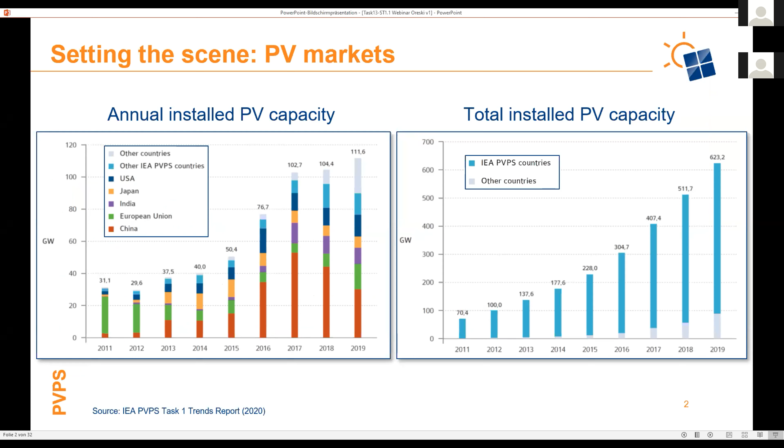Generally, we live in amazing times. The PV market is still growing, and every year we see an increase in this market growth. That sets the scene for the Photovoltaic Power Systems Programme, because PV is moving into a lot of places. We see fast technology progress, high installed capacities, record prices and record levelized cost of electricity, increasing competitiveness of photovoltaics in the market, new business models, broader applications, different customers. We see it moving into the overall energy system, constantly moving towards the terawatt era and becoming mainstream. That is an amazing thing. When I remember back to when I started my research career in 2003, people discussed PV becoming mainstream in maybe 50 years or so. Actually it happened quite a lot faster.

So what is the PVPS in a nutshell? It's an association having 32 members, mostly countries, but also 4 associations. They form a truly global and unbiased network of PV expertise, representing all main stakeholders in R&D, industry, implementation and policy. The members cover a large majority of worldwide production, application and markets.

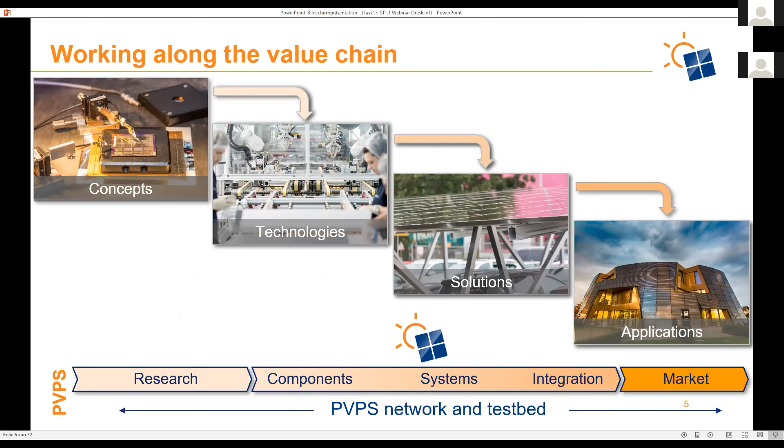We work along the value chain. In our network we have researchers, manufacturers, companies, and operators dealing with photovoltaics along the value chain. So what is our role? We look into the present and future of photovoltaics worldwide. We try to identify and understand relevant issues for large-scale deployment of photovoltaics. We collect and exchange facts and experience, analyze precisely, draw appropriate lessons learned, and communicate all findings in a clear and targeted way.

The benefits are that we provide advice for different stakeholders, including policymakers. We try to accelerate development and learning in the market and prevent errors from being repeated. We identify successful policy approaches and business models, and try to provide long-term market, environmental and policy insights, in general expanding and accelerating the deployment of photovoltaics even more in the future.

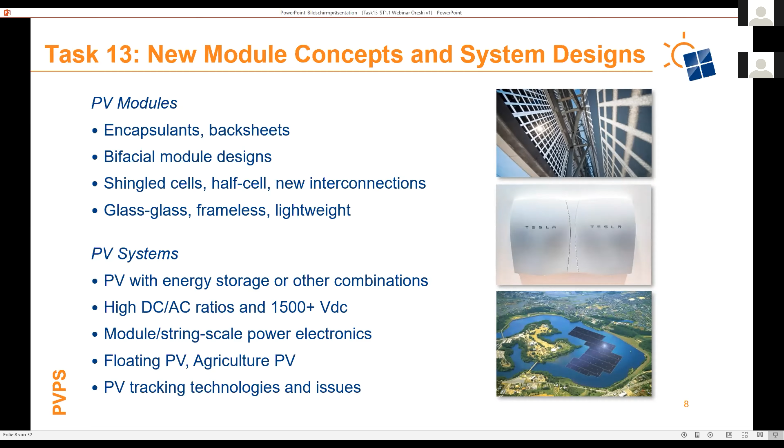Right now we have eight active tasks in the PVPS program. I'm part of Task 13, which deals with performance, operation, and reliability of photovoltaic systems. Within Task 13 we have 3 major topics. The first is to look in detail at new module concepts and system designs, especially questions related to quality and reliability of these new concepts and designs. We do a lot on performance of PV systems, especially analytics of available data, and we also look at how we can improve operation and maintenance of PV power plants.

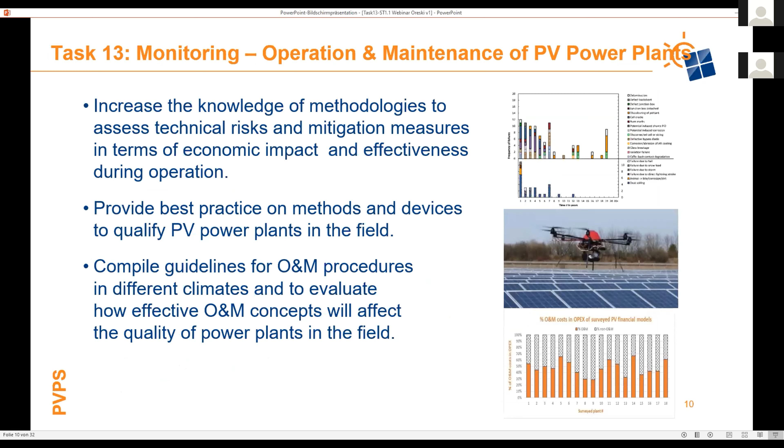Last year we were quite busy, and overall 12 technical reports were published across these 3 fields. Today we are focusing on the designing new materials for photovoltaics topic, which was published 2 months ago. My talk will start with motivation, benefits, and opportunities for new material and module developments in photovoltaics, and then Laura will continue and go more into detail on certain PV module components.

Let's start. First, I want to show you some quite interesting results that colleagues of mine in Austria presented last year at the European PV conference. We have a very interesting system installed in Austria, on top of a mountain, at about 2,000 meters height. The system was installed in 1988, so about 33 years ago. When you look at the annual degradation of these modules after more than 30 years, they're performing quite well. The best performing modules, from Kyocera, look like new.

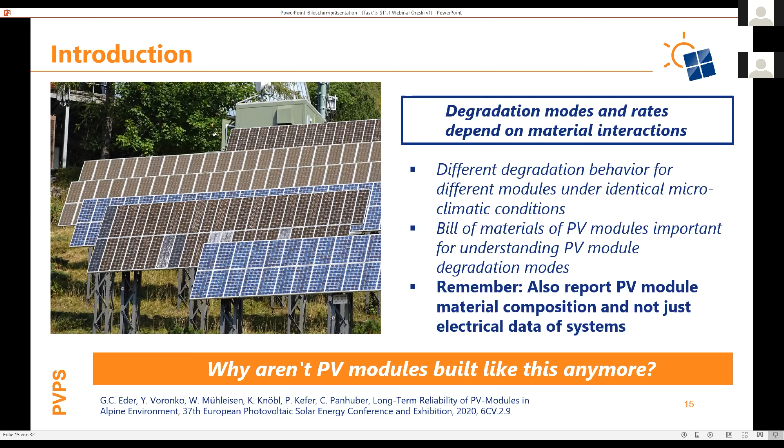So the question is that I asked myself and that we discussed in several groups: why aren't PV modules built like this anymore? So very resilient, very long lasting. The answer for that is quite easy, because...

What happened in the last 20 to 30 years, especially in the last decade, is we saw a massive decrease of price. For every doubling of the production, we saw a price reduction of 25% at least for the last 40 years. And with that, the average efficiency of the modules increased significantly from below 10% to now more than 20% efficiency for monocrystalline silicon PV modules.

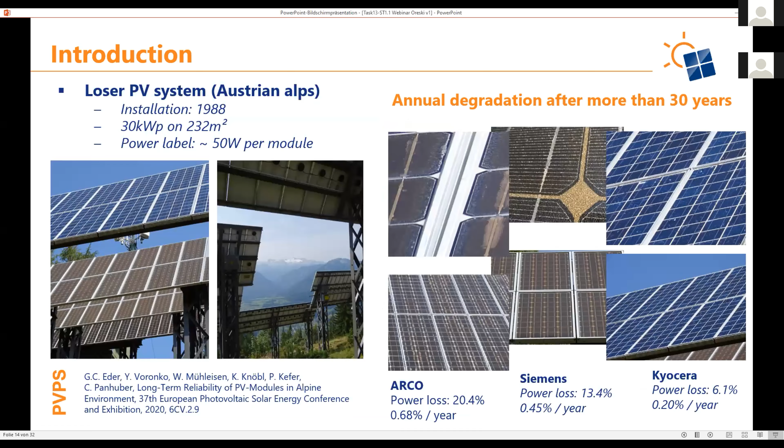As you see back here, these modules had a nameplate power of like 50 watts per module. And where we are now is we are getting into 500 watt modules and higher.

So what we saw is a big change in the market. And even though the design of the PV modules remained similar—we always have glass, encapsulant, the connected cells, the ribbon connected cells, and the backsheet or another glass layer—the materials that are used evolved.

Michael Woodhouse and colleagues from NREL actually prepared this really wonderful chart for the new ITRPV report. This is just to show you how much PV changed over the last 40 years, where we started with very small circular cells, got into small pseudo square cells, and right now we have these very big pseudo square cells.

We are going to half cells, and you just take a look at the watts per module and the module sizes that are typical. So from 40 to 100 watt modules, now we are having 600 or 400 to 500 watt modules currently. And when you take a look into the future...

actually with multi-junction modules in tandem cells, we will get modules with like 1 kilowatt of power, maybe in 10 years. So just imagine this, what happened.

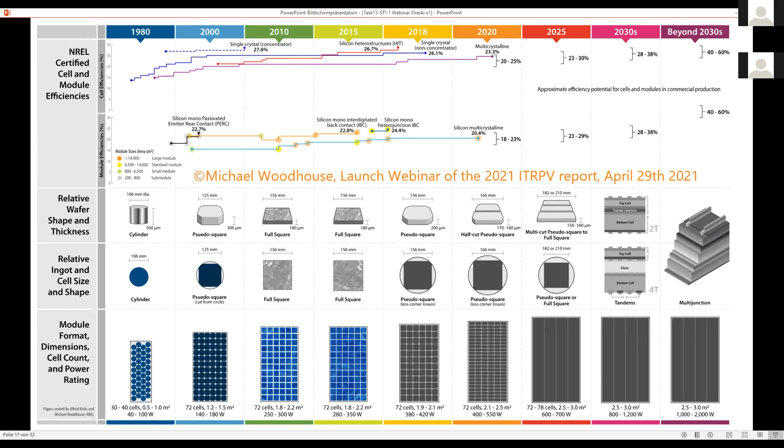So what have been the motivations for all these changes for new materials and new module designs? I would say the biggest motivation was always decrease of levelized cost of electricity. So either it's cost reduction or performance improvement. And what we saw constantly was a reduction or replacement of expensive materials.

In general, solar cell thickness went down, silver content went down, glass thickness went down significantly. We also saw expensive materials like fluoropolymers started being replaced by more economic materials. So all of that helped a lot to get a cost reduction.

And this is a process that is still ongoing when you take a look at the projections done by the International Technology Roadmap for Photovoltaic, for example, where they foresee still doubling of the silver content reduction in the next 10 years, depending on cell technology.

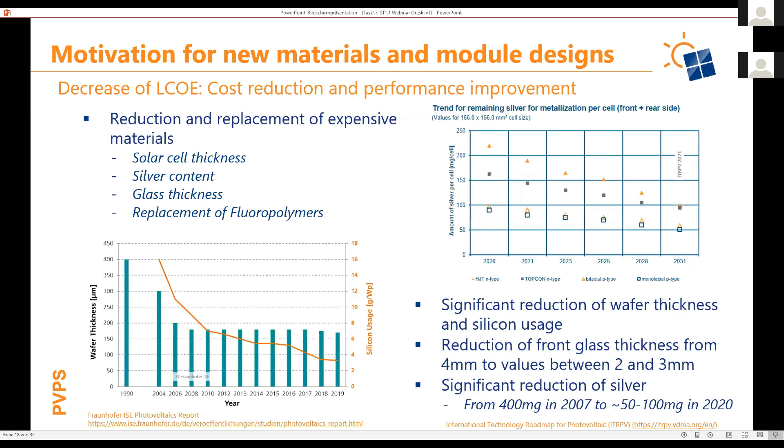So what were other factors, or approaches for cost reduction? What we saw was generally an acceleration of the manufacturing process. We started with standard cure EVA, then fast cure EVA popped up 15 years ago. Then we had ultra fast cure EVAs 10 years ago. Currently, we are getting into thermoplastic encapsulant that can be laminated with lower temperatures and lower times. So everything that gets the module production time down a little bit.

And then we had several changes and new developments that promised a performance increase. When we are looking at the cell interconnection, we saw going from 2 bus bars, 3 bus bars to 5, 6, 7 bus bars, and all of these multi-wire systems. One main motivation for the performance increase was the reduction of the resistive losses and the cell shadowing.

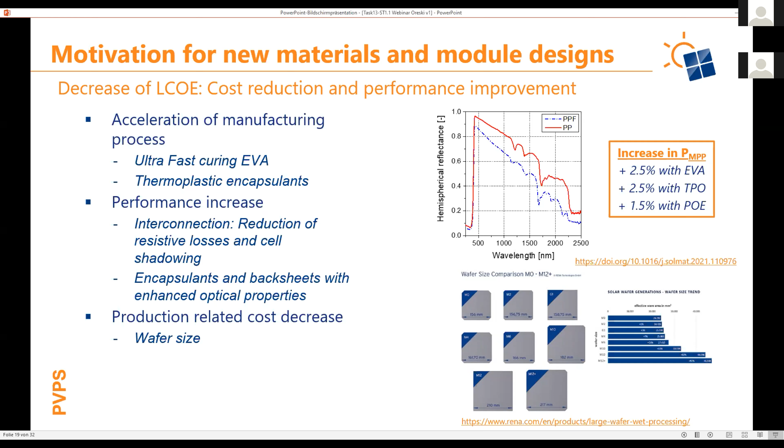And the same goes for encapsulants, so I think Laura will show you something about this. Also, what we saw in the last years was a continuous increase in wafer size, also leading to production-related cost decrease.

Another motive for bringing in new materials and new module designs is sustainability, and connected to that, certain legal regulations. Especially in the European Union, there is currently a process for eco-design of photovoltaics running, and I think it's nearly completed, that at the end we get some sort of eco-label for PV modules that have more sustainable components and more sustainable production processes.

We are starting to talk about recycling and increasing the recyclability of photovoltaics, because we are putting out hundreds of gigawatts every year, so there are billions of modules out there, and at the end of life we need to think about what to do with all this amount of material and modules.

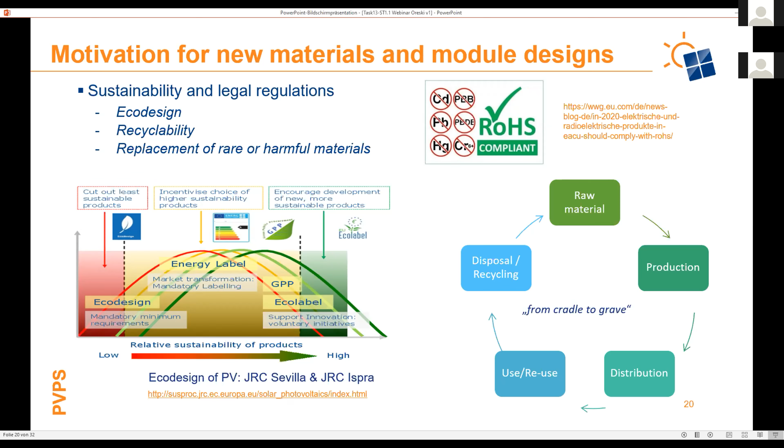Also we see, at least in the European Union, legislation like the ROHS legislation for electrical devices, where rare or harmful materials should be replaced. For example, lead is usually not allowed anymore in any electrical device, and photovoltaics is just one exception here. We don't know if this exception will continue forever, or maybe in a few years the European Union will say you have to get rid of the lead and replace it with another material, meaning the whole interconnection needs to be changed, especially the solder material.

Another big motivation for new materials and new module designs is new technological requirements. Here we are looking mostly at new wafer technologies or bigger wafers. In the last years, we saw quite a change in cell and interconnection technologies, and also new module designs were brought up.

What we see right now is actually a very big shift from aluminum BSF cells going to PERC and heterojunction, which will become the new dominant cell technologies. We see half cells gaining more market share, and we also see module sizes increase.

Especially for heterojunction cells, which are more sensitive to, for example, temperature-induced stresses, these cells are predominantly interconnected with multiwires, which is a totally new approach for interconnection.

But we also saw that structured foils, for example for back-contacted cells, are gaining more attention, and shingling will also be a topic for the future, becoming more important. All of these technologies combined have one thing in common: they lack long-term outdoor experience. We know a lot about indoor tests, but we still don't know how these shingled modules and multi-wire connected modules will behave in 10 years or 20 years.

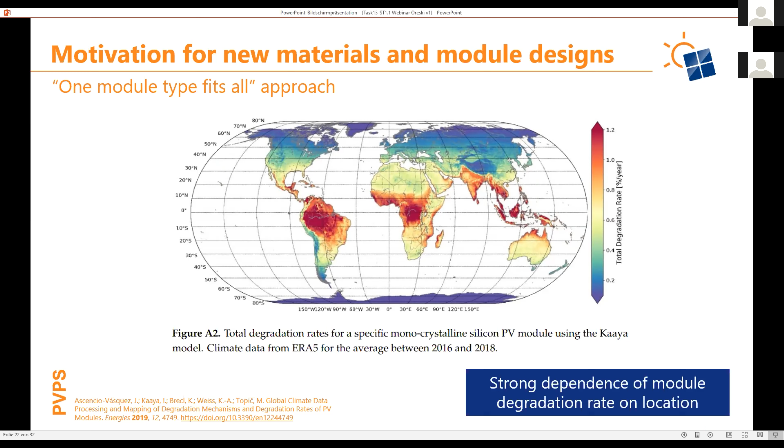Also what is a big topic right now is integration of photovoltaics. And by integration, I mean integration into nearly everything. So we talk about vehicle integrated PV, building integrated PV, PV integrated in transport infrastructure, like this nice Austrian project in cooperation with Germany and Switzerland, where they want to make roofs across highways made of photovoltaics. We talk about integration of photovoltaics in agricultural land, and a very big topic also, floating PV.

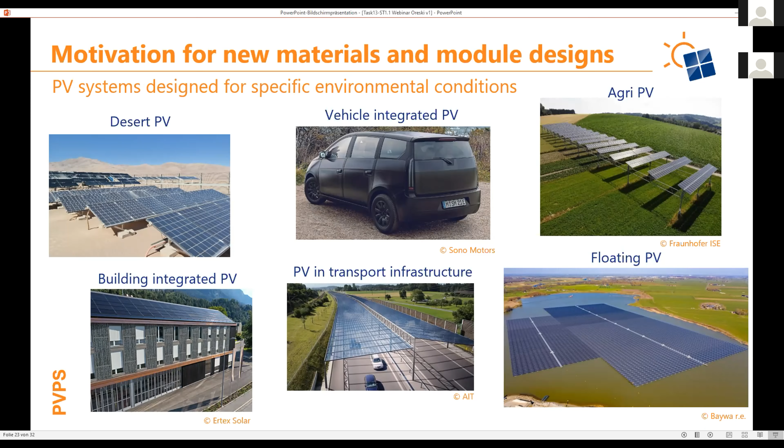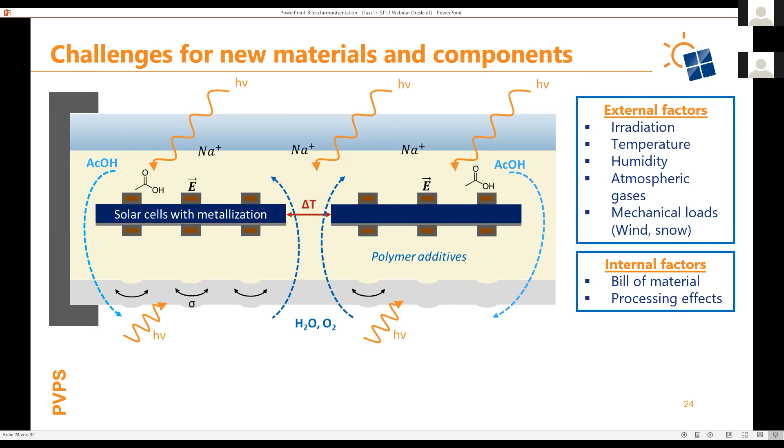So what are the challenges for all these kind of new materials, for these new PV modules? The challenge is shown here schematically. This should be a cross-section of a PV module with cells, interconnects, glazing, encapsulant, and backsheet. And you see we have a lot of external and internal factors, stresses acting on the PV module, from irradiation, temperature, humidity, atmospheric gases, and mechanical loads. And of course, the composition of the PV module, the materials you use, and the processing effects also influence the long-term behavior.

How do they do that? The materials have to withstand all these stresses at the same time for a very long time. Photovoltaics, or let's say PV modules and PV materials, have to withstand an extremely challenging microclimate with acting stresses all at the same time.

And when you change just one component, like you put in a new encapsulant or put on a new backsheet or some new interconnection material, you can change the whole equation here, you can change the whole set of reactions and change your degradation behavior significantly.

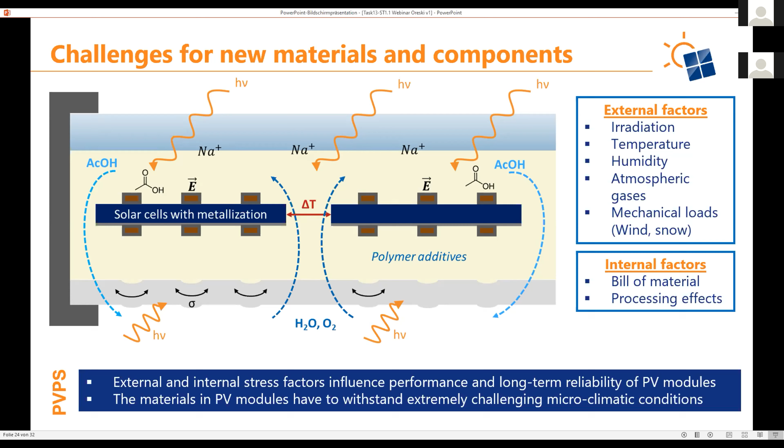And what I see, that will be the interesting part, at least from my point of view as a reliability engineer: what will happen with all of these new materials? I have the feeling we will see a lot of compatibility issues in the future. When you combine the wrong materials, you will have problems with adhesion, and we will see more delamination. For example, when you have new encapsulants and combine them with a standard backsheet, but the backsheets are usually optimized towards adhesion for EVA, which is the standard encapsulant, then maybe you will get some problems.

I would say yellowing in general, discoloration, will be a big issue. It has always been a big issue, but with new material combinations, you will get new possibilities for this yellowing. The same is true for corrosion, because we see a broad variety of new ribbon materials, new interconnection technologies, new encapsulant films, new backsheets. All of these are influencing, let's say, corrosion.

And what we saw in the last 10 years is also an emergence of new degradation modes. So until 5 years ago, just my assumption, nobody spoke about LETID, light and elevated temperature induced degradation. 10 years ago, it was all about discussing PID. All of these issues came up with new technologies, like new cells, new cell designs, new encapsulation materials.

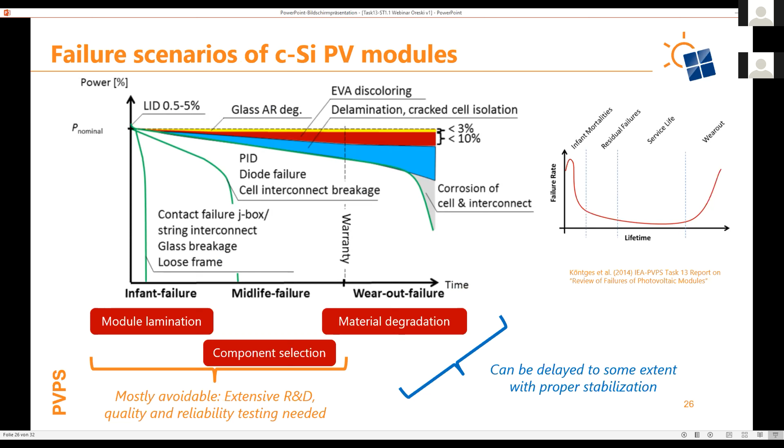But infant failures are very often correlated to bad lamination, bad processing. And midlife failures are also very often correlated to bad component selection. Many of these failures can be avoided by extensive R&D, by extensive quality and reliability testing. And this is still something the PV community has to do, while other industries, like the car industry, are way ahead, because they do much more long-term reliability testing than photovoltaics, even though their product is not there for 25 or more years.

So how can you do testing? That's what we usually use in polymer engineering. We have some sort of test pyramid. You start with a material, where you can test a high number of specimens at a very low cost and effort.

And then you go up, you test components, films, laminates, mini modules, up to full-size modules. But the higher you go up into your testing pyramid, the higher the cost and the effort of testing. Nevertheless, you need to cover all of these levels, because you learn something different on all of them.

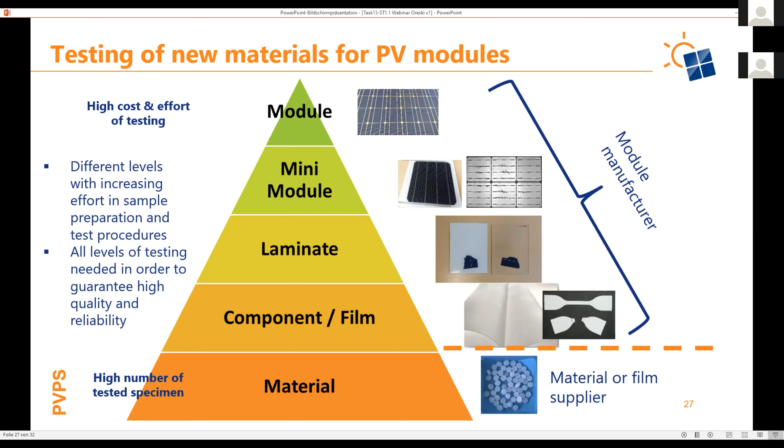And it's an effort, but it's an effort you need to do, and actually everybody in the PV community should do, in order to avoid unexpected failure modes. And just to summarize, I want to present you one of these unexpected failure modes.

I think all of you have heard of the polyamide backsheet failure. These co-extruded polyamide backsheets were introduced into the market in 2010 by an Austrian company, and it was a big success, an instant success. So what was the motivation for this backsheet development?

There was a problem with the raw material supply for the then-standard backsheet composition, because the so-called TPT backsheet was dominant, and the T stands for Tedlar, that's PVF, polyvinyl fluoride. There is only one manufacturer of this, and there was a market shortage, so there was a big incentive to develop new materials, and that happened.

So this material was introduced, and then in the next 5 years, estimations are around 10 to 12 gigawatts of PV was sold with this polyamide-based backsheet.

And then in 2015, this happened. Depending on the locations where the modules were installed, the modules started to show different types of backsheet cracks after some years. In more severe climates, it happened after 5 years; in Austria, we see it starting after 8, 9, 10 years.

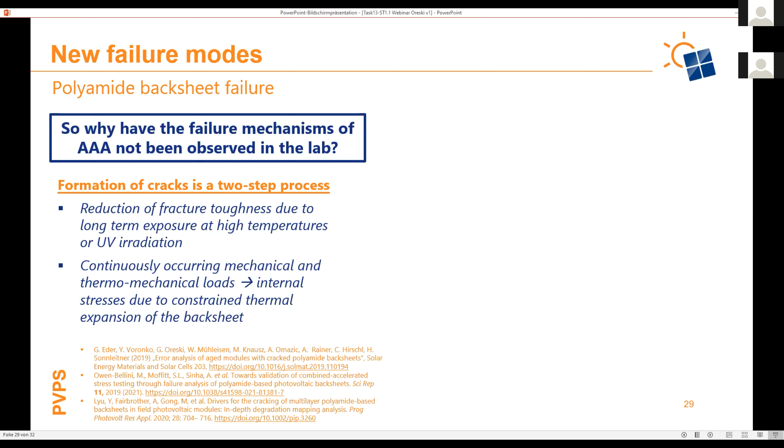We have wind loads, snow loads, so all of that is working on the PV module. And you need both factors in order for crack initiation and crack propagation.

So what was done? Back then, single stress testing was state of the art. They made materials, films, mini modules, put them into the climate chamber, in a UV chamber, in thermal cycling. But it was never the same module going into all these tests - it was one module for damp heat, one module for UV, one module for thermal cycling.

And the problem was, with all these tests, you either just have reduction of fracture toughness but no mechanical impact and no driving crack-propagating force, or you just have the mechanical loads but no material damage that you need for the crack to be initiated and grow. So you couldn't catch it.

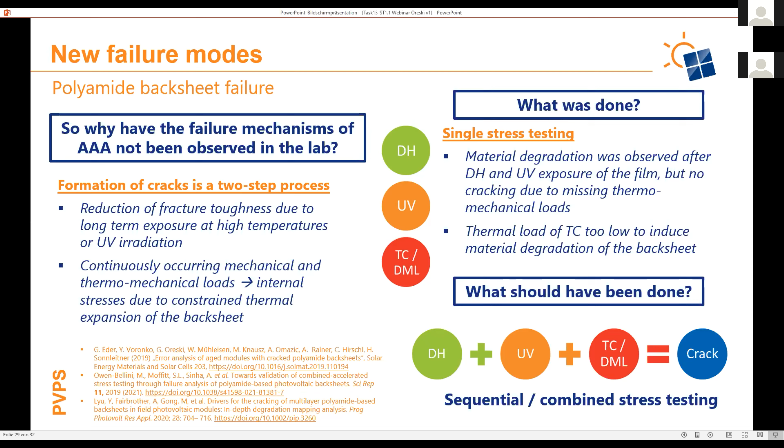What should have been done? Actually make a module, put it into damp heat tests, then put it into the UV chamber, put it into some thermal cycling, and then cracks will happen. So you need some sort of sequential or combined stress testing.

And that's what's happening right now, and that's actually how industry adapts to this. So some years after these cracks first occurred, several research groups, especially in the US, took on this problem and tried to replicate this backsheet cracking.

Two different groups - one from NREL with their combined accelerated stress test, and DuPont with their sequential stress test - both succeeded in recreating these cracks after accelerated indoor testing. It still takes some time, several months, in order to create these cracks, but they managed it.

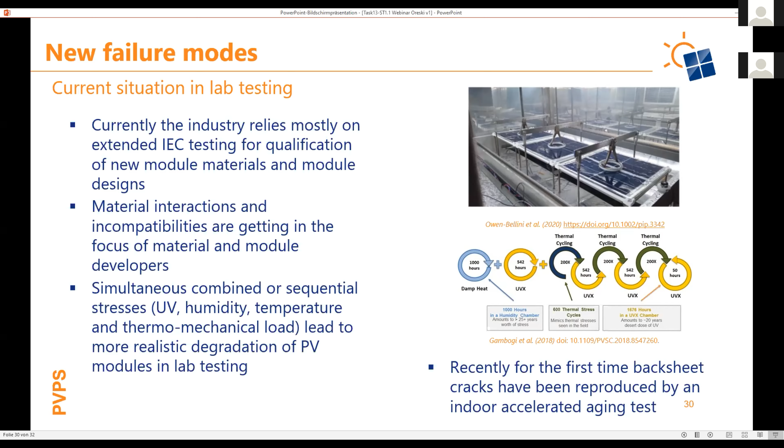And right now we know how to test backsheets, and these experiences are also being introduced into newer versions of the standards, just because we learned about this. And this is the constant challenge that we have with new materials and new components for PV.

So to conclude, there are several motivations for new materials and module design. Most important is the decrease of LCOE, so cost reduction and performance improvements, but also new technological requirements, sustainability issues, and legal regulations can be a motive for new materials.

The challenge is always the same: the long-term stability of a PV module is determined by the bill of materials and their interactions. Therefore, each material combination must be tested thoroughly before being introduced into the market in order to avoid such unexpected failure modes. Also, as I showed, single stress testing, as is still done very often in industry, often does not reveal certain degradation modes which are observed in the field.

So we need more combined and sequential stress testing in order to check these kinds of failure modes. I foresee that the check of compatibility of PV module components will get more and more important in the future, especially as the variety of materials and components grows, and we will see new degradation modes we could not think of right now. Because of that, we have a constant need for adaptation of test methods and test standards. And in general, design matching of components and materials will get more important because they may reduce degradation rates or

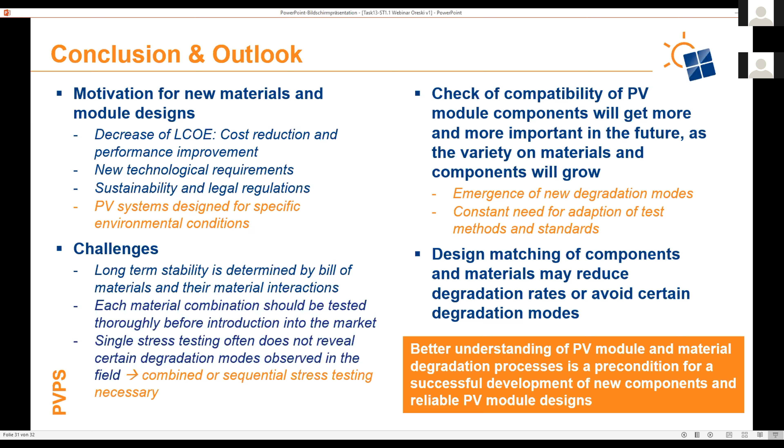avoid certain known degradation modes. And in general, I think that's a sentence I put in most of my presentations: a better understanding of PV module and material degradation processes is a precondition for a successful development of new components and reliable PV module designs.

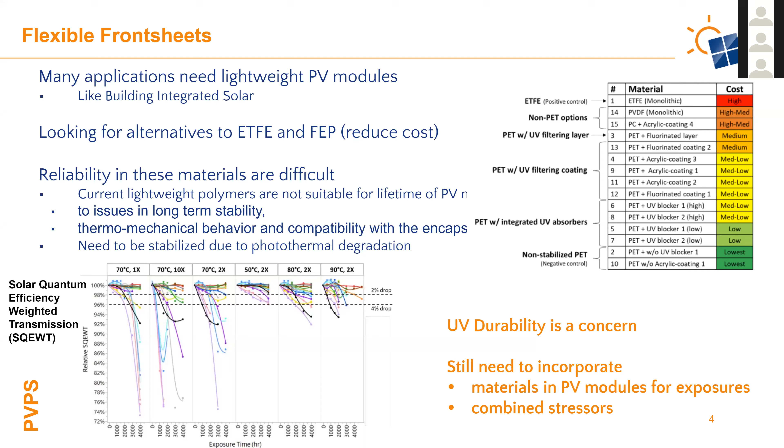So next we're going to talk about encapsulants. So we have the front sheet, which is typically glass - now we can look at some flexible front sheets - but now we're looking at the encapsulants. So right now, most PV modules out there are made with EVA. That's the huge market share of PV modules out there, but that's starting to change, and PV manufacturers and material manufacturers are making different types of encapsulants. So I'm going to talk a little bit about POE and TPO, which are new types that are coming out.

So when we think of POE and TPO, these are polyethylene copolymers. There's no vinyl acetate group, so that's different than EVA. So you shouldn't get formation of acetic acid with these materials the way you do with EVA.

So polyolefin is a cross-linking material, and TPO is a non-cross-linking material. TPO generally has a higher melt temperature than POE, but you can have shorter lamination times. Generally, they have higher volume resistivity than EVA and lower water vapor transport rates than EVA. So they generally have similar optical transmission profiles.

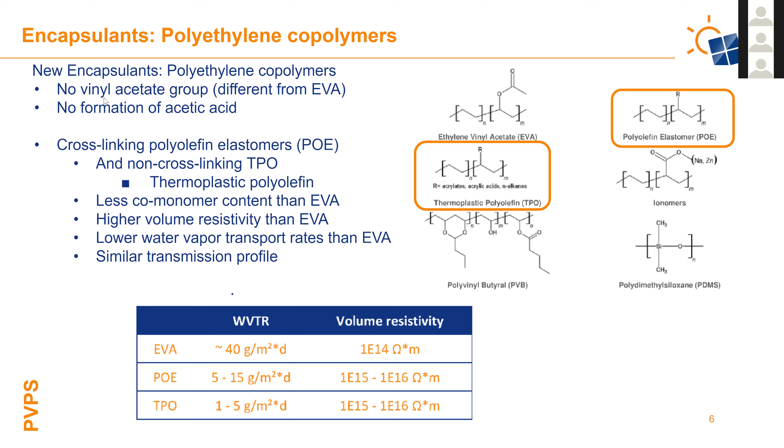And this is because the EVA is hydrolyzing and causing corrosion of these grid lines, but we don't see that in TPO and POE. So this suggests that they're not inducing that same degradation mechanism, and they don't have that acetate group.

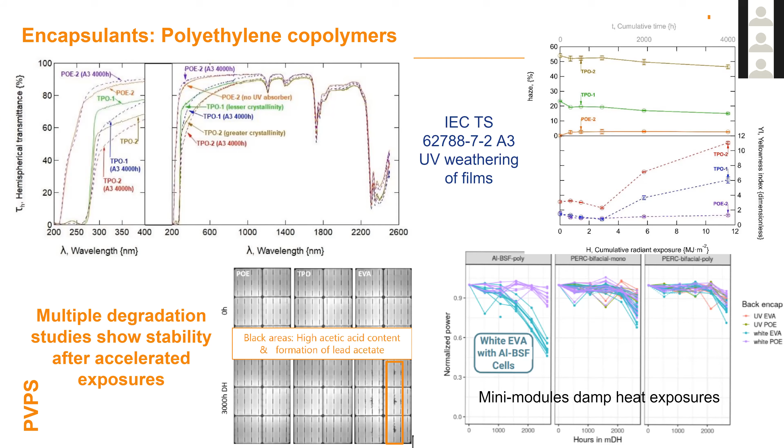And then another type of encapsulant that's starting to be looked at again is silicones. So PDMS and its derivatives were historically used in the 1980s due to its stability and durability. It's reported in the PV literature. We also see in other areas that these silicones are pretty durable. However, there was a cost problem, so it was limited use in PV. It was applied as a viscous liquid, so it was hard to do in line and without as much cost.

But what it seems is the silicones provide corrosion protection, they don't really have discoloration, and they don't really have PID, and they still have high optical transmission in the UV region. So a new silicone encapsulant sheet has come out so that you can laminate it under conventional vacuum heat lamination, has similar properties of the previous liquid form. But we still need reliability data on, again, mini modules, coupons, and full size modules.

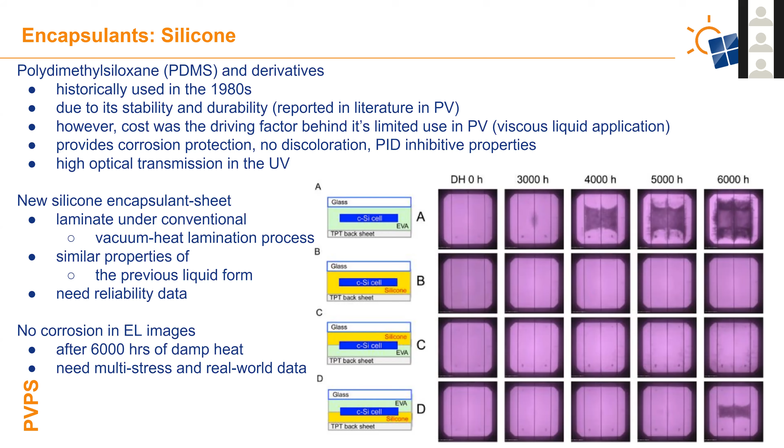Something new being discussed is these metal matrix composites that are added to the grid lines, which are multi-walled carbon nanotubes, and they can actually bridge cracks in metallization.

If there's a fracture in your cell, that can cause a fracture in the metallization, which causes power loss as well as being a root cause of hotspots. So one way to potentially mitigate or correct these cracks is with these multi-walled carbon nanotubes, which can help self-heal cracks or electrically bridge them so you don't get the drop in power.

So we do need to look at this further, at a larger scale, and built up into PV modules. But this might be a way to mitigate these small cracks in our metallization.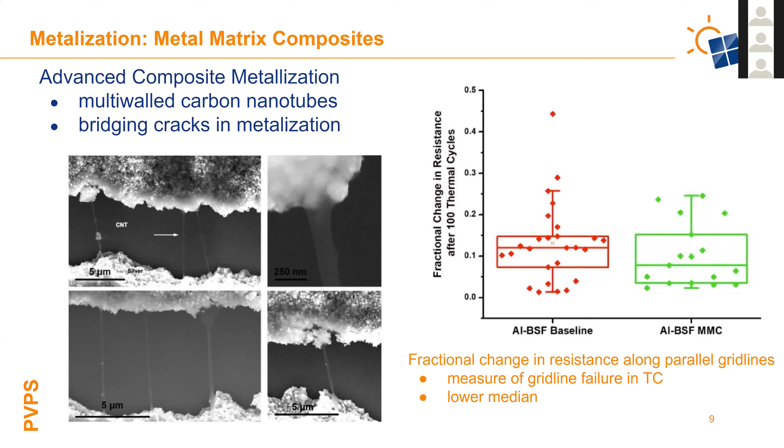Another thing to think about is multi-wire interconnection. These are bus-barless interconnections with multi-wires, about 18 wires, and they still have front metallization fingers.

One driving force behind this, as Gernot had said, is you want to reduce the amount of silver used. Silver is expensive. Just like increasing the number of bus bars, we can decrease the amount of silver used. It also increases the cell area, so we have better light capturing.

These multi-wire interconnections are nice because you can actually do this at a much lower temperature, and that's beneficial for silicon heterojunction cells because they like to be at a lower temperature.

We're going to talk next about electrically conductive adhesives, but that also reduces the amount of silver used compared to typical screen printing. These multi-wire interconnections have much less silver.

So this was really nice preliminary work showing that these are actually decreasing the cost by reducing the silver, as well as potentially increasing the power we can get out by increasing the surface area, and not degrading faster.

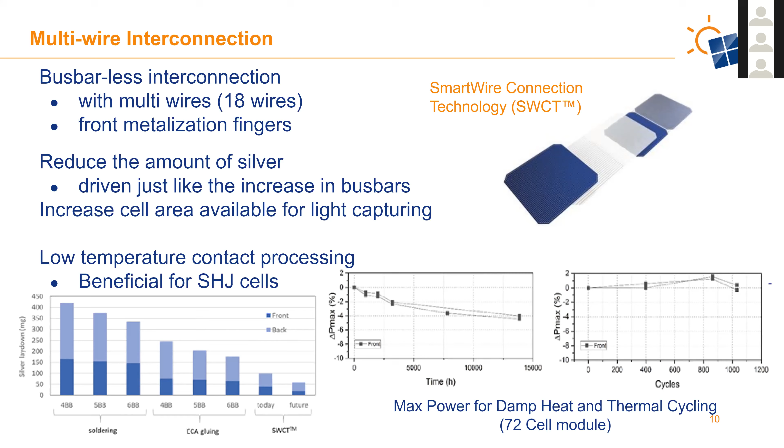The advantage to this is there's no bus bar, and it enables interconnection techniques such as shingling or conductive backsheets. This is helpful when we're thinking about new architectures or new ways of incorporating PV.

If we can do shingling or have these odd-shaped PV designs, that allows us to integrate PV into different applications much more easily. There's also low temperature processing, higher resolution printing, and easier handling.

There's less thermomechanical stress on cells with this technique, so potentially you can have thinner wafers.

Another added value to this is that there's no need for lead, so there's no more lead solder in this case.

So there is some variety in what's being reported in the literature on the reliability of these, and it seems to come down to material handling or manufacturing of the materials.

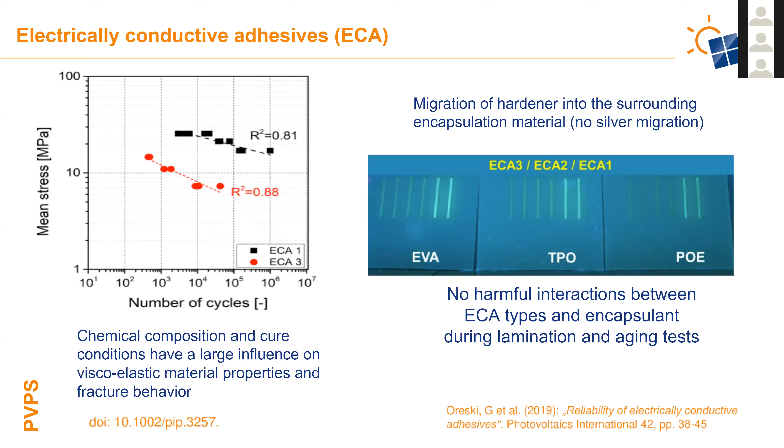And then our last material is backsheet, which is typically a polymer backsheet on the back. Sometimes there's glass in glass modules. And the most common backsheets are PET PVDF or PET PVF. And again, as Gernot had said, they are trying to remove these fluoropolymer-based materials because they're more expensive.

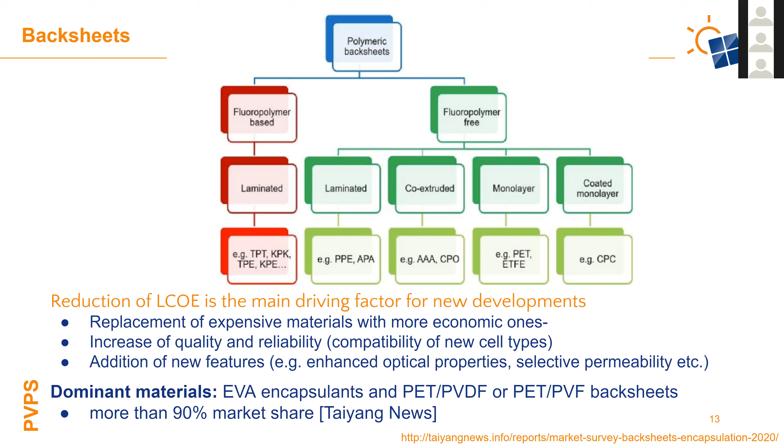We want these fluoropolymer-free materials, and we can manufacture those by laminating, co-extruding, or using a monolayer of material. So one new technique out there is transparent backsheets, and these are important for bifacial modules, which are already being deployed commercially and used. Instead of a glass back, you can use this polymer back. This is easier transportation because they're thinner and lighter, so you can install a little easier.

One of the challenges of these transparent backsheets is that you have to remove the TiO2 that's typically added to backsheets to protect the PET core. So you still need to be able to protect that PET core if there's a PET core or any inner layers. And then oftentimes they're adding a white grid layer to protect between the cells, so that the area between the cells isn't completely transparent.

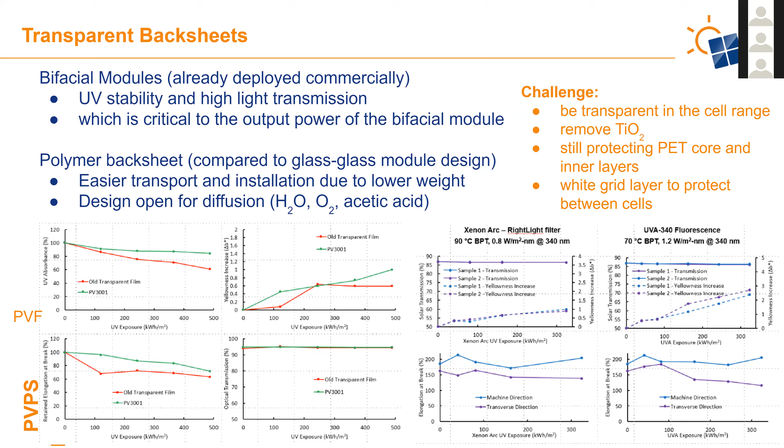And then again, as Gernot talked about, polyamide was one of these failures back in 2010. We moved away from PVF and PVDF to these co-extruded polyamides. Co-extrusion helps where we can have much better thickness optimization. You reduce the number of processing steps, and you can be a little more selective on permeability, so you could permeate high acetic acid out while not necessarily allowing a lot of water into the module.

But as we knew with our first co-extruded polyamide backsheet, what we got was a lot of failures. Gernot went over this a little bit, but I want to touch on it again: the degradation mechanisms in these failures are not exactly the same. We have micro cracks, not pictured here, which happen at local areas with a little more stress, just a tiny crack on that outer air-side surface of the backsheet. Then there are longitudinal cracks that happen just over the bus bars, due to a change in height over them, causing tensile stress, and that's where you get these cracks, also happening from the outside air side of the backsheet inward.

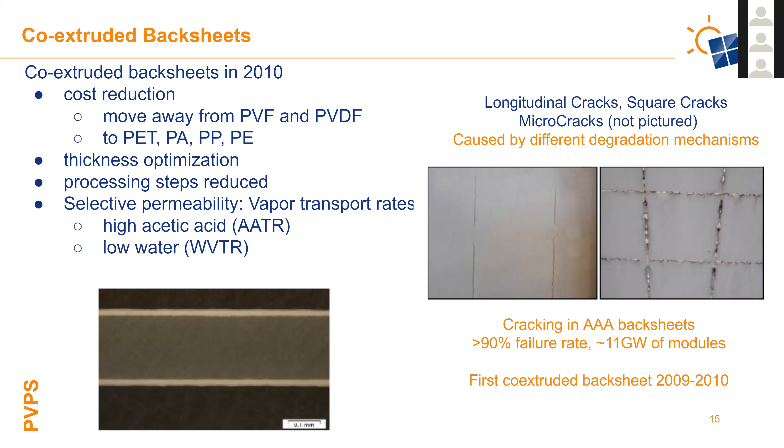So one thing to consider when thinking about stressors on a PV module is that the stressors within the module itself are not uniform. In this case, the area in between cells is causing a degradation feature that isn't happening on the areas of the backsheet that are behind the cells.

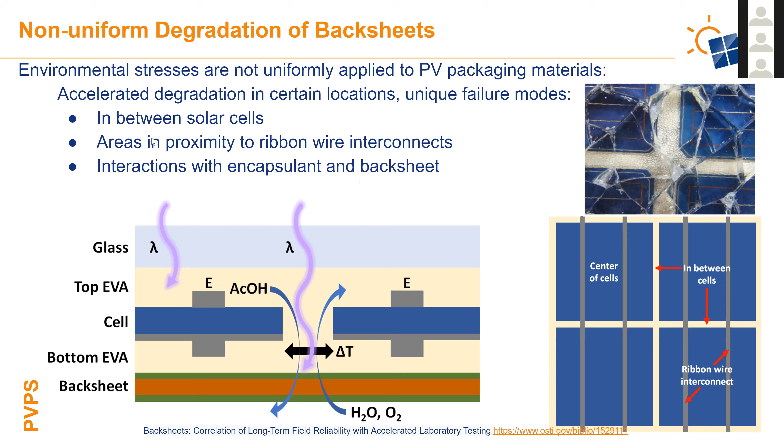This can be different though, based on your climatic zone, the angle of light, whether there's snow on the ground, which may increase reflection or albedo. So where a module is installed on a PV site is important. That microclimate can cause more or less degradation in the materials. So we need to think about macroclimatic zones, but also how we're designing our PV sites to potentially reduce materials degradation.

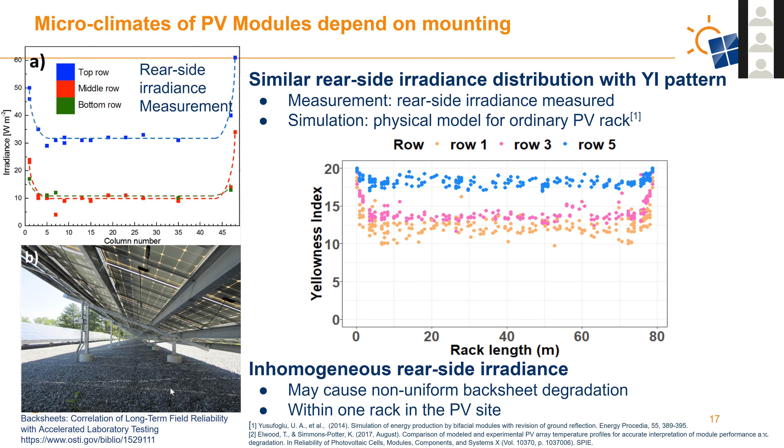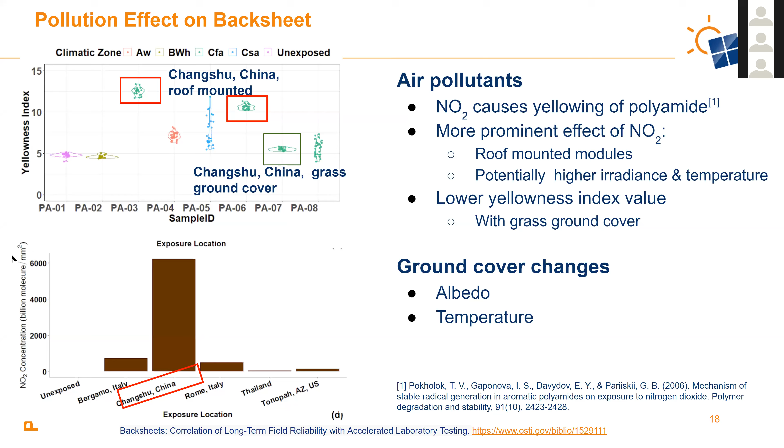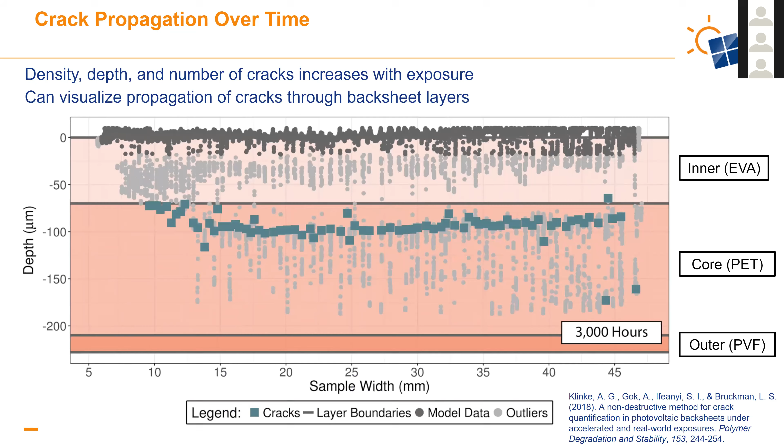And what we found is we didn't get polyamide cracks, just like a lot of the accelerated testing didn't see polyamide cracking. That's because we just had films and they didn't have the stress they have inside a laminated module, where there are different stress conditions. So just studying the materials by themselves is really important to understand what's happening, but you have to add the layer of physical mechanical stress that happens when you incorporate materials into the PV module.

What we found is there was very little cracking at just our 1x outdoor exposure, with one backsheet type cracking, but that was only for 12 months - it was PVF PET EVA layer, so this FPE2. What we also found is we got a lot more cracking with the cyclic exposure, which caused the most cracks. So again, as Gernot was saying, we were incorporating UV plus a thermal shock, going to condensing humidity and changing temperatures.

So we need to be able to understand what's happening in our material, quantify the differences happening due to different mechanisms of degradation, as well as modify these accelerated exposures and observe real world exposures as well.

So to conclude, new materials show great promise to reduce costs and increase lifetime. In our ST 1.1 report, there are a lot more examples of new materials, but we need to be aware of interactions between materials. Encapsulant and backsheets degrade and they're interrelated to one another. Temperature ranges needed for lamination can impact different cells. Different grades of materials, different crystallinities, and the quality of additives matter as well.

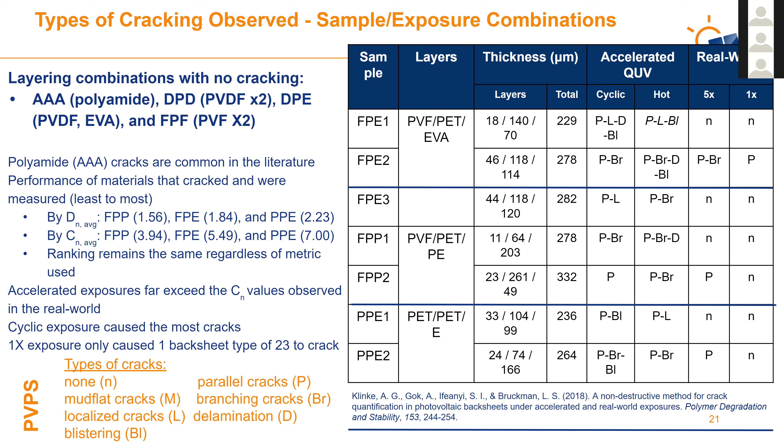It's really important to obtain real-world data on our materials, components, and systems, and also look at accelerated stressors that mimic real-world degradation. New materials need to first consider reliability, durability, and lifetime, which may not always be the same as the most cost-effective option. I'd like to thank the collaborators who wrote this report, especially Gernot and Josh, who were the editors. Thank you very much.